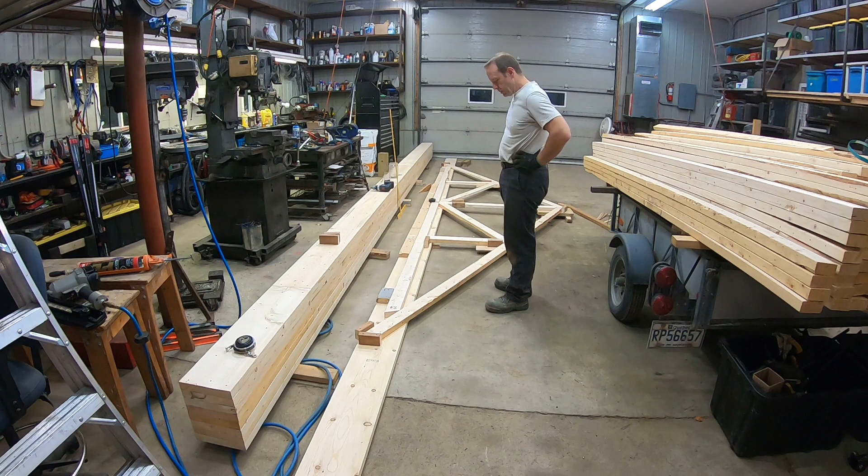So I've done a jig, actually a few jigs on the chop saw, so I can cut them consistently from lumber to lumber. I'll show you that. I have some blocks, so I make sure that from one end to the other end is going to be a perfect, exact same length, and blocking also for exact same height.

So there's nothing as bad as when you set up all those trusses and you put the purlins on it and it goes wavy. Ask me why I know that. So it should be very, very consistent. I think you can see clearly.

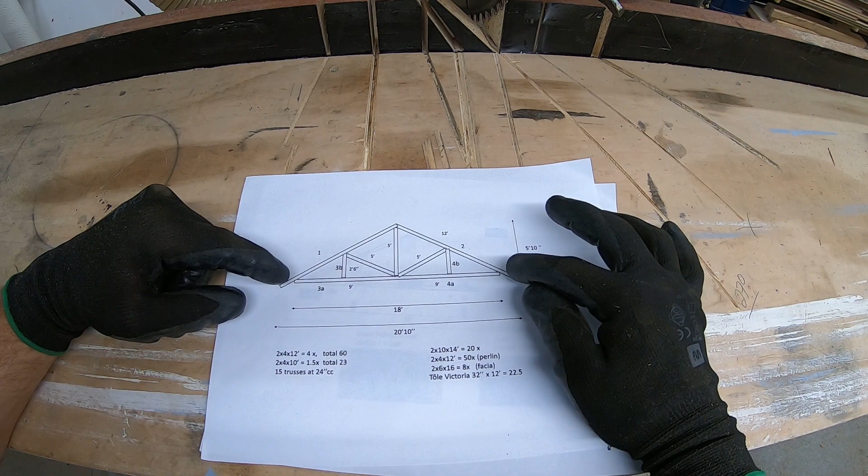So I've used, believe it or not, PowerPoint. You make shapes to the exact size. So 18 feet across is the in between the beams. Actually, the actual measure is 19 feet, so I had to make a slight adaptation to that. So it makes the slope just a little bit smaller. The overall length is 21 feet, which is pretty much what I get, 20 and 10.

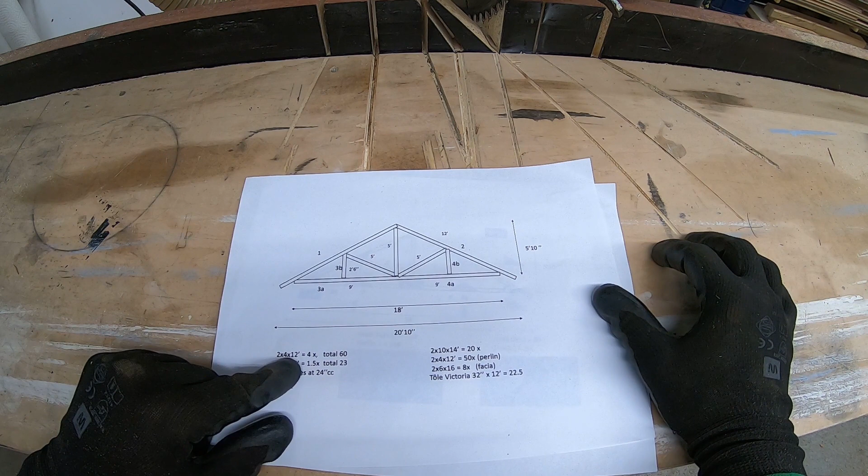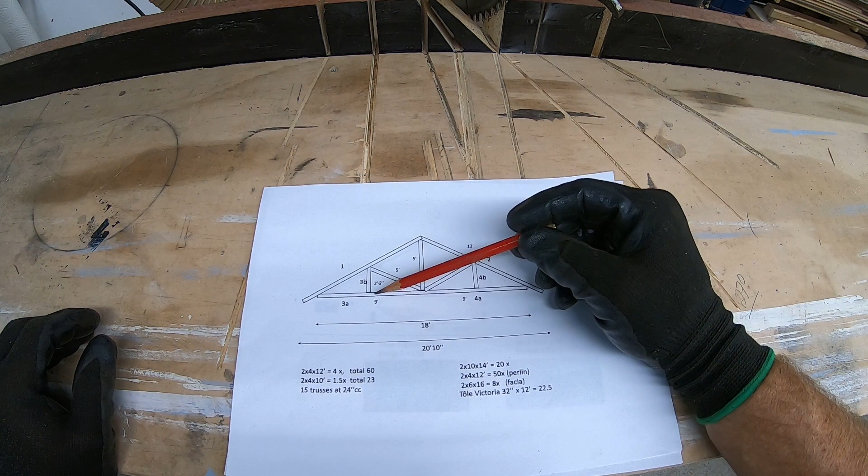And then what I did, so I ordered 2x4 12, and I did make calculation of how many of each lumber I did need. And here, I'm going to point with that pencil. Sorry about that. 3A, 3B means that out of a 12 feet, I've got one section from here to here, 9 feet. And this is where it ends. And the remaining of that is going there. And I'll let you see that, but there's an angle here. And what is left from there is going exactly here. Same on this side for A, for B.

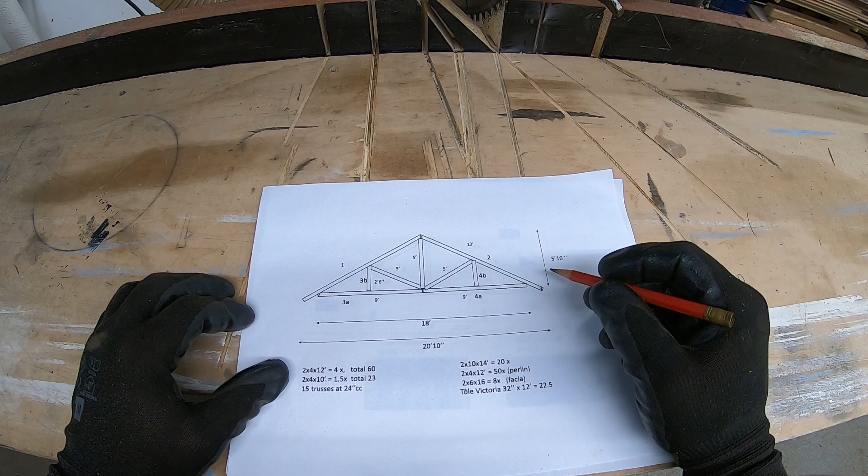Then here I use the 2x4 10 feet, and then actually there's not much scrap, so I'm going to make pieces for that. And for this one, it's actually a 12 footer. The only thing I do is I cut the end angle like so, and I keep the full length of it. And then I need to do 15 trusses, and then it's going to be 24 inches center to center.

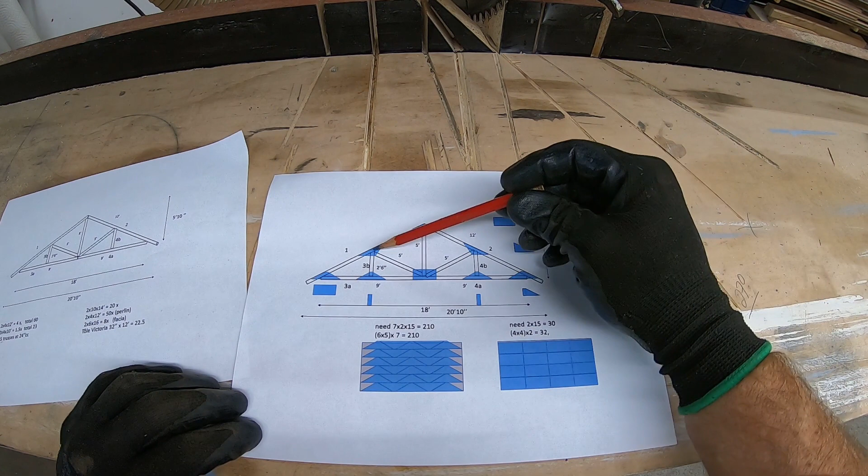Then the next part will be here. I'm going to cut pieces of plywood to put here, and then I'm using always the same shape of plywood here, except for this one in the center, because I have to catch so many pieces together, actually 5. So I need 7 sheets, which will produce those 5x6 pieces, triangle or small triangle, or almost so.

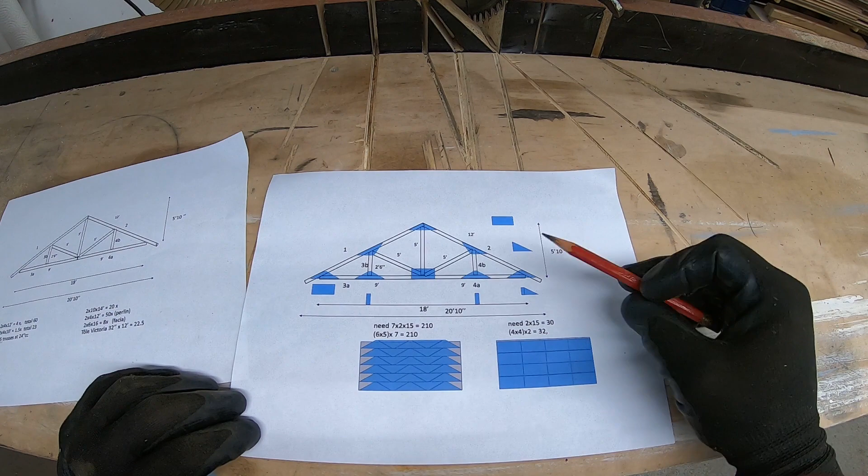And then for the rectangle, I need 2 sheets, where I'm going to get 4x4, and then with 9 sheets total, I'll be able to produce those small, let's say, gusset or reinforcement. So that's the goal. So making the first truss, this is pretty much the scrap I had. Might not be this one.

Okay, the ends of the top rafter, and then the remaining. So when I produce this one in the center, it's going to be against this one 90 degrees, and it's 27 degrees. I only need to fit that to make the point end, and then when I need this one, it's actually both ends same angle. I just bend this one a bit, and I take the remainder of this one, put that against that, and then it's going to cut the exact length I need.

I'm not going to do anything more tonight because it's very late, so I'm going to cut more material tomorrow. Stick around.

Okay, we've cut all the material because now Mike is here. Thank you, Mike, for coming. Welcome. And then we cut all the 2x4s, and plywood was cut yesterday. Now we're down to assembling the trusses. Should be easy. Stick around.